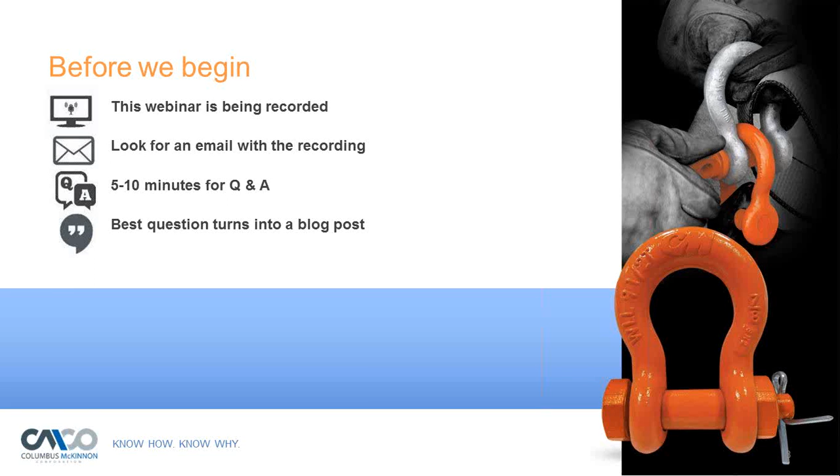Thank you, everybody, and good morning. Just a note that these presentations are no substitute for OSHA regulations or safety standards that are out there. We do encourage you to seek those standards and specifications out, as well as contact the manufacturer for any additional information. So we'll get started.

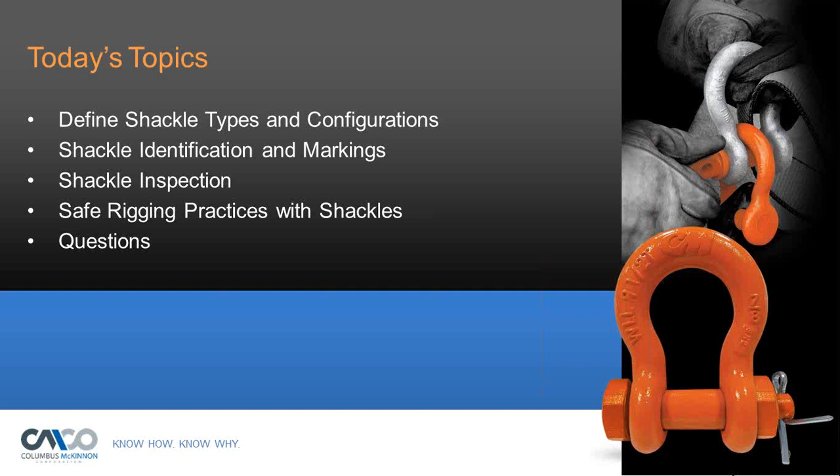Today we're going to define shackle types and configurations, shackle identification and marking, shackle inspection, safe rigging practices with shackles, and then we'll take any questions that you may have at the end.

When you buy a shackle from Columbus McKinnon, our shackle meets a variety of standards. There's a lot of quality and engineering that goes on, even though you look at it as a simple forging. Really, we can probably stack a pile of books two feet high that we go through to meet certain standards, so that you have a safe product in the industry and you're getting quality rigging hardware from us.

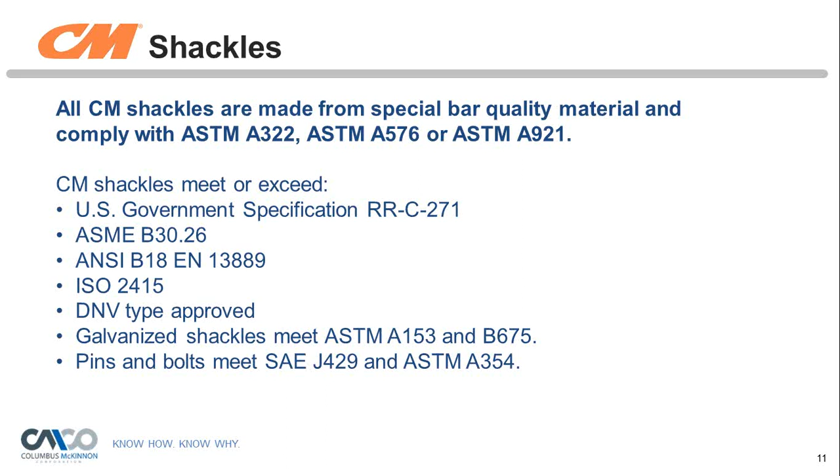So the types of shackles that are out there, and these are the most common: you have a screw pin anchor style shackle, and the shape of that body is what they call an anchor style. I'm not quite sure where the word anchor style came from, but that's where it came from.

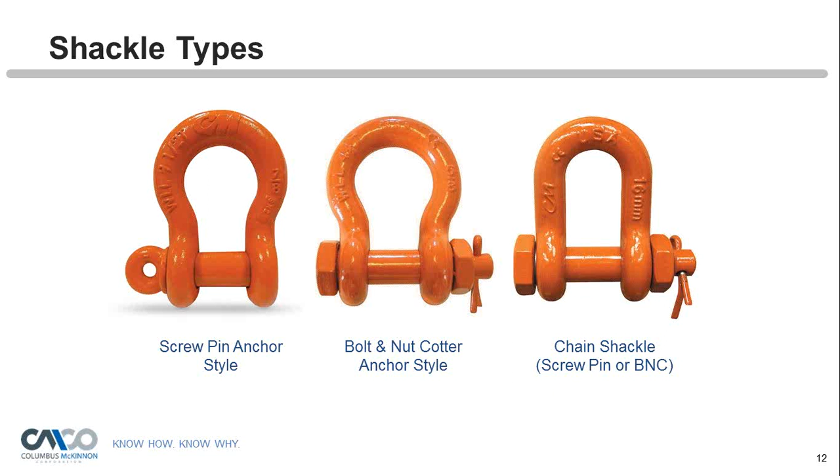Bolt nut cotter style shackle, you can see there, is a little bit more secure, has a pin with a bolt, nut and cotter in it. We use that for more semi-permanent applications, whereas the screw pin anchor style is more of a take-it-off-every-time-you-rig type. And then you have a chain style shackle, a smaller type, and you can get that in screw pin or bolt nut and cotter style.

So why would someone choose the screw pin style? Well, it's easy to remove. This is probably one of our most popular kinds of shackles, a screw pin anchor style shackle. You can get it painted, galvanized, self-colored, or in black if you so wish. If this type of shackle is going to remain in place for any extended period of time, then we recommend mousing the shackle. Really, if it's going to remain in place longer than the lift, or like a semi-permanent application, the bolt nut cotter is the way to go. But if you have these shackles and need them to remain in place, we do recommend you do what's called a mouse tail.

Hey Peter, what size wire do you need for a mouse tail, and how would someone go about doing this? Well, there really isn't any specification for what size wire. You want something that you can work with, that will bend.

There's a hole in the shackle pin there. That hole is actually there for a spanner wrench so you can loosen the shackle up. But you might want to wrap it 2 to 3 times around, go through the hole, through the pin. So something adequate, but not too difficult to work with. You want to make it easy on the riggers to do, something that just stops that pin from loosening up while it remains in place.

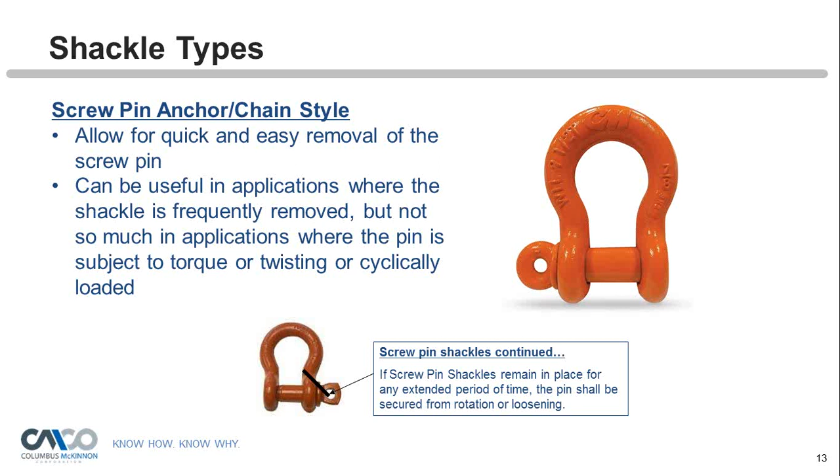Okay, great, thank you. Good question, we get that asked quite a bit. Okay, there's your bolt nut cotter style, a more permanent or semi-permanent type for applications where it's going to remain in place. That's the style you want to use, and you always need to have that cotter in place so it secures that nut from backing off.

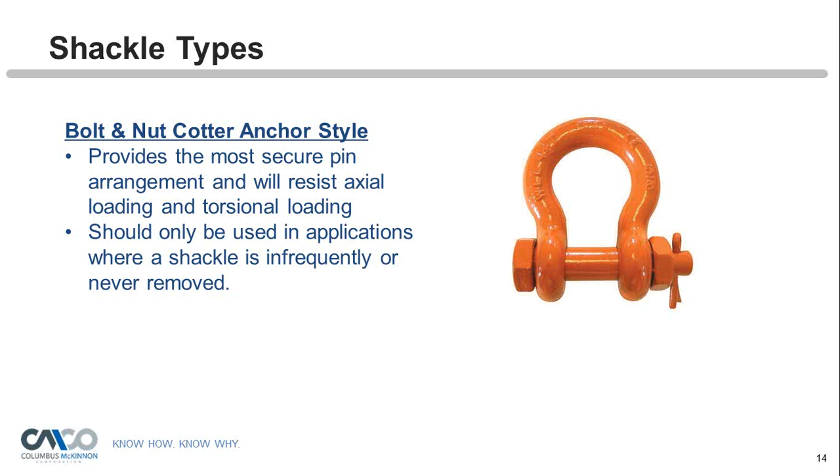And then you have the chain style or D shape, we call it D shape or chain style shackles. You can have bolt nut cotter, or you can have screw pin style of that. They're a smaller type shackle. They always have to remain in line - there's absolutely no side loading allowed with these.

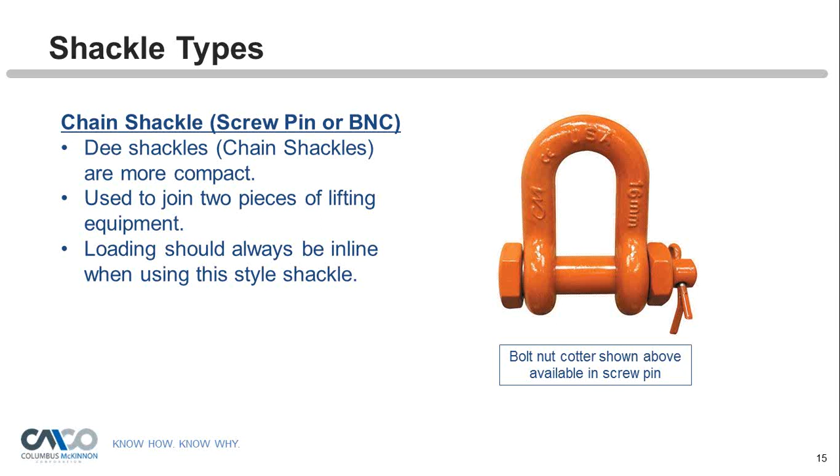We also have one called a long reach shackle that is used for applications where a hole or attachment is quite a ways down, so it has the same type of shape, but more for inline loading only.

Okay, then we come up with a round pin style anchor shackle, and the round pin really is not recognized by the ASME B30.26. So this is more for tensioning, pulling, load securement applications when it's not an overhead lift. So basically the rule is if the pin doesn't have a thread, or the body is not threaded, or you don't have a bolt nut cotter, then you shouldn't use it for overhead lifting.

So in the event that something were to strike up against that pin, you only have that cotter there and the pin can come out. So we do not recommend that for overhead lifting.

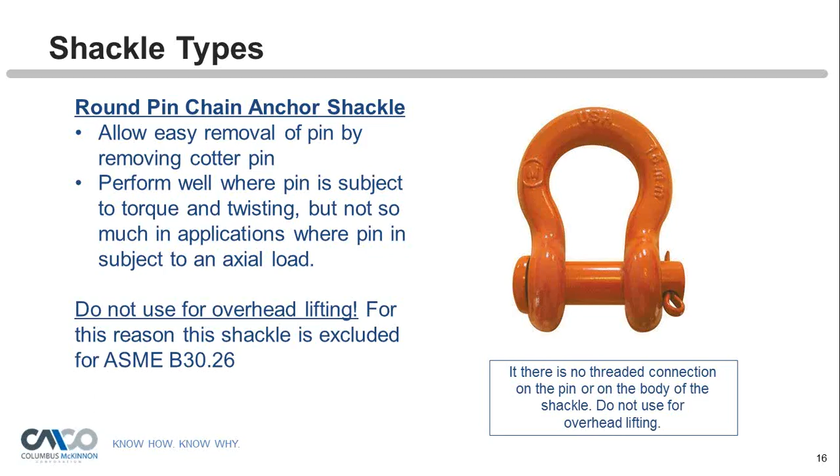So what type of shackle should be used for overhead lifting? Is it carbon, super carbon, alloy, or all of the above can be used? If everyone can vote - if you're on an iPad you won't be able to, unfortunately, but you can send me your answer on the Q&A pane. Everyone else should be able to just tick it off and vote. Give it another couple seconds. So again, what type of shackle should be used for overhead lifting? Carbon, super carbon, alloy, or all of the above can be used.

Well Peter, it looks like a few people mentioned carbon, but it looks like it's 30% alloy and about 66% believe all of the above can be used. Can you share the answer? Yeah, well 66% is correct.

All of the above can be used, and it gets a little bit confusing because when you talk about chain slings and things of that nature, we recommend only alloy chain slings for overhead lifting. But for shackles, you can use carbon, super carbon, and alloy. CM, by the way, is the only one that offers a super carbon shackle. In reality, it's a better carbon shackle with alloying elements in it - not quite an alloy shackle, but not quite carbon either, and we call it super carbon, which gives us higher working load limits.

Higher than - kind of an in-between - for basically the same price you can get a carbon, so it's a step up, and I'll get into that a little bit. But all of them have different work limits. So physically, size for size, you could have 3 - in this case 7/8 shackles - laid out on the table, and unless you looked at the embossing and the working load limit, that's the only way you would know what to use. You can't just rely on the size of the shackle for the working load limit, so you need to look at the embossing because you have 3 different types.

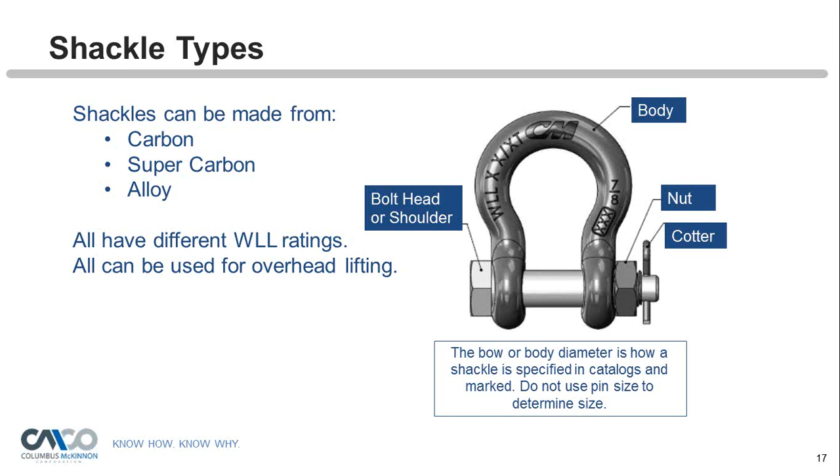And then they have design factors. Carbon and alloys have a 5-to-1 design factor, and our super carbon has a 6-to-1 design factor. So for ease of explanation, let's say a shackle has a 1,000-pound capacity. The carbon and the alloy at 5,000 pounds, it would start to deform. That's where the shackle would start to deform. Where a super carbon is 6-to-1. Obviously, no overloading is allowed whatsoever.

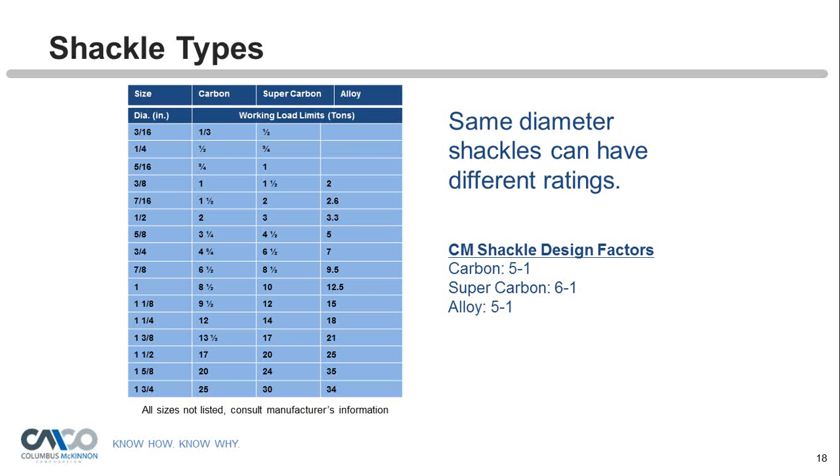This is when I go back to that original slide, I talked about the quality and the standards that Columbus McKinnon meets. That's what allows you to have, in the event something bad were to happen... things can happen beyond our control, and mistakes happen, but we always want you to stay within the work limit and figure out what your tensions are and things of that nature. But just to give you an idea of the design factors there, which is interesting.

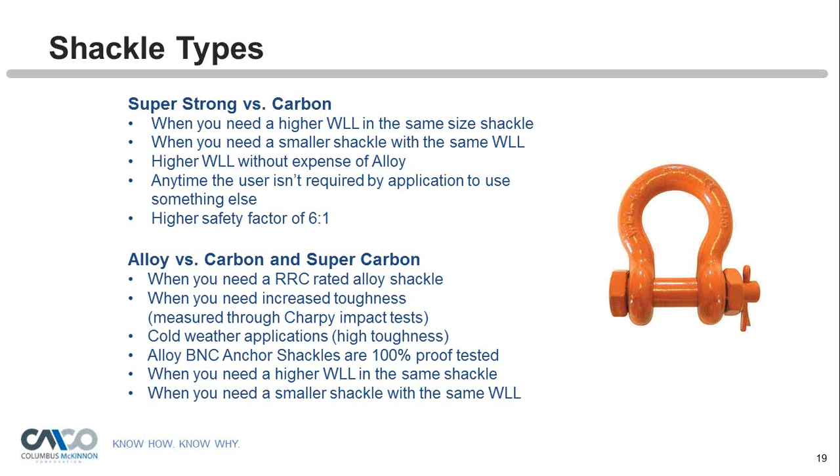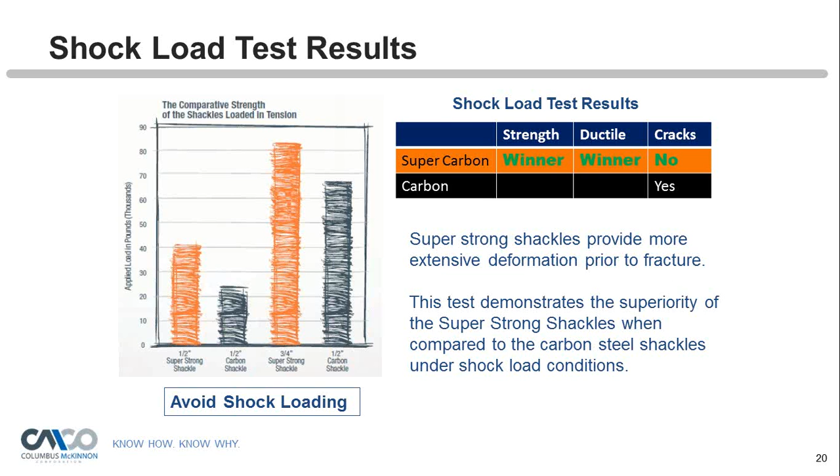Okay, shackle identification and marking. So what's required on a shackle is the size of the shackle - you can see on the body there at 7/8. That's required. The name of the manufacturer, the unique name of the manufacturer, is also required on there. And of course, the working limit of the shackle is all required. What's not required is a serial number.

Now, a lot of people want to start inspecting shackles and things of that nature, which you can and you should. And the rigger should be inspecting each and every lift. It doesn't take long to inspect a shackle.

So those in the Navy or in the nuclear world, they have a pretty stringent system, and that helps them a lot for tracking and inspections and things of that nature. So, even though it's just a forging, you can make the shackle sophisticated by offering RFID and serializing it and creating inspection reports for them.

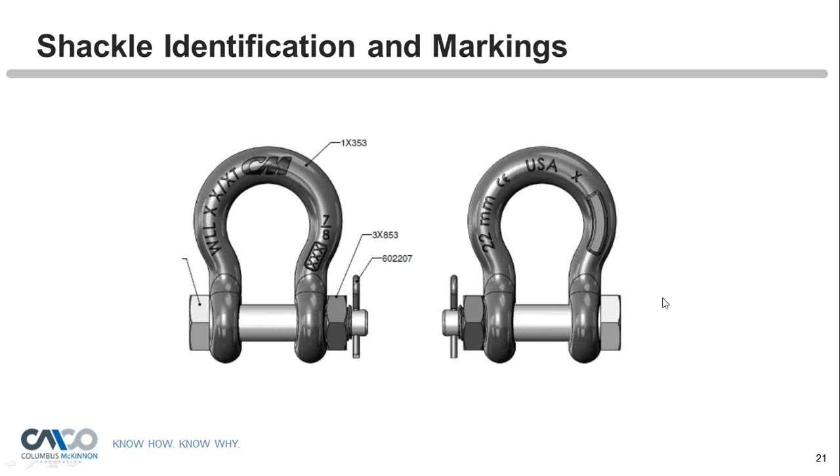So there, like I said, name or trademark, manufacturer, rated load, and the size - that's all required by ASME B30.26. I have seen shackles out there where they're kind of second-rate shackles, if you will, and they may have the country of origin on there, and that's it. And the country of origin is not the manufacturer. So they have the work limit, they may have the size and a country of origin, or no manufacturer at all, so you don't even know who made it. So who do you call when something goes wrong? Who do you call for answers? Who do you call if you have technical questions?

The very first slide I showed you was look at the quality that CM puts into their forgings. Again, it'd be a stack of books about 2 foot high, and we have this regular quality process and things of that nature.

I forgot to mention that our shackles are made in Chattanooga, Tennessee, and we encourage anyone that wants to visit our plants can see shackles in action and see them being made. Certainly would welcome anyone to the plant there.

All right, so we talked about the bodies a little bit, but then we have the pins. So the pins are identified as well, and that's another sign of a quality shackle - look at the pin. The pin has to have an identification mark on it. You can see we put CM and HS, that stands for high strength, and we have a trace code on the pin. We can also offer RFID chips within the pin as well.

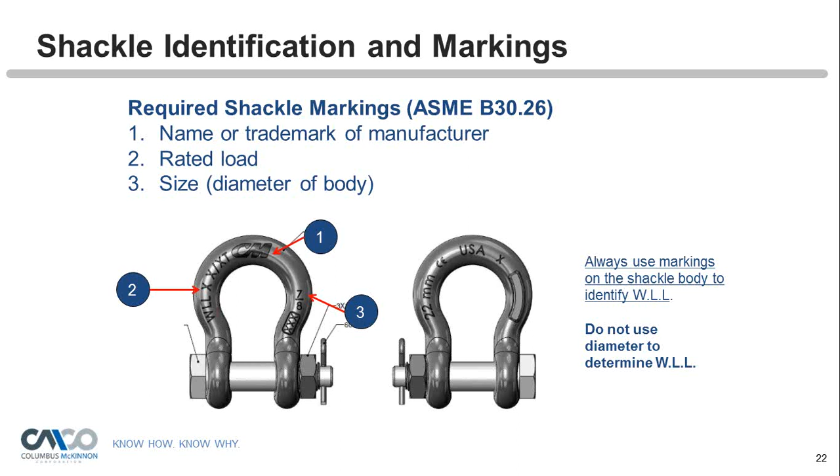Okay, and then okay, perfect. Thank you, Peter. Okay.

So kind of an actual picture of one of our pins. You can see the trace code on there, the CM name, and the high strength - again, another sign of a quality shackle. Even every part of that is labeled so that you know that you're getting quality parts inside it.

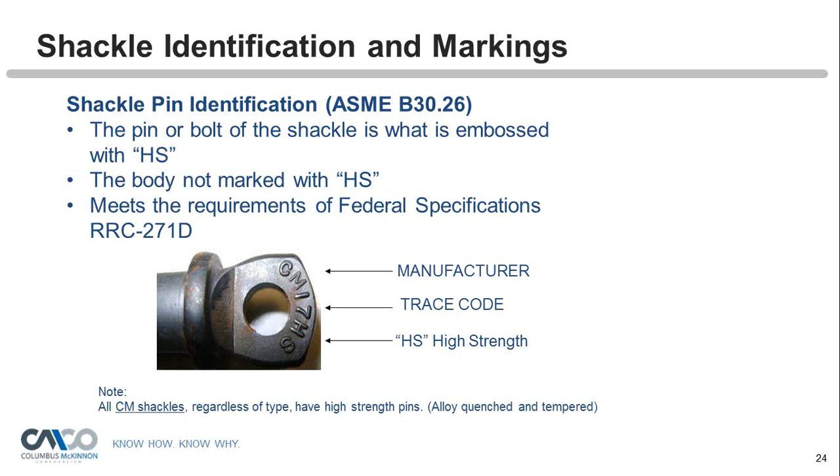So think about that - next time you look at a shackle, you don't know who the manufacturer is, and then where did that pin come from? There's no markings on the pin, no traceability. These are all things that you want to be sure are there, so that when you're choosing a quality product.

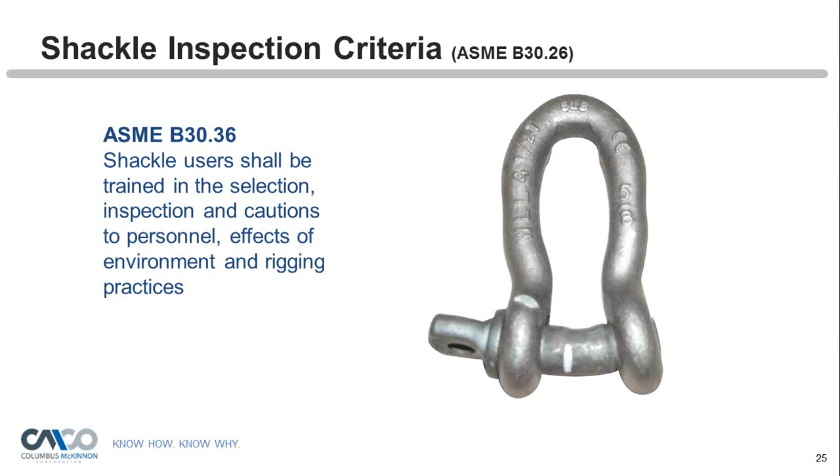B30.26 says shackle users shall be trained in the selection, inspection, and cautions to personnel, effects of the environment and rigging practices - so basically a trained rigger. So we do offer rigging training that you can learn about shackles. This seminar, this helps this training as well. And we can actually come to you, we show you how to use them hands-on, and there is probably 100 uses of a shackle, how it can be used in different applications, and that's what we're going to touch upon as we go through here.

Per B26, a visual inspection shall be performed by the user or other designated person each day before the shackle is being used. So basically, that's the rigger. The rigger needs to know, a qualified rigger, is the shackle safe to use? Are all the parts there? Is that a quality shackle? Are all the markings there? Okay, and that's important.

Semi-permanent shackles in inaccessible locations where frequent inspection is not feasible shall have what's known as a periodic inspection. So if you need a lift to get up there, obviously we can't inspect it each and every lift. An inspection criteria called periodic inspection means you're going to have to set times where you go up and look at that shackle, based on the application. It could be every month, could be every 4 months, could be yearly, but it has to be specified.

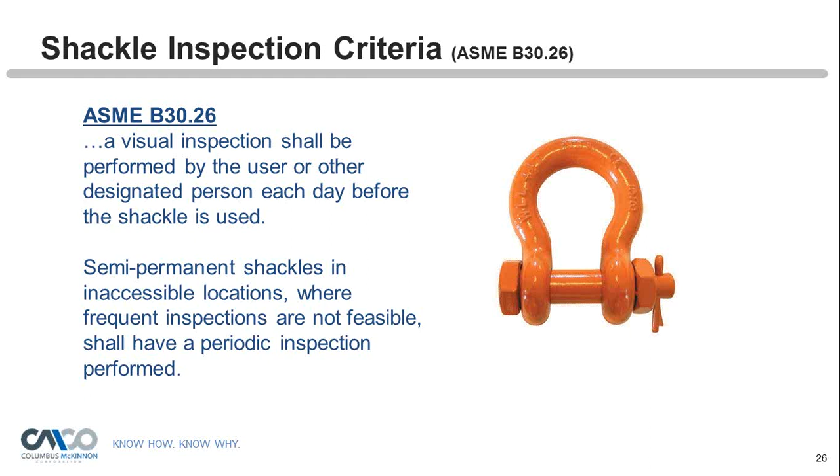So what's a periodic inspection? It's a complete inspection performed by a designated person. It shall not exceed a year. Written records are not required. Obviously, these shackles are not serialized, so how would you keep track?

One way, if you want to have written records, is the stamping that CM allows with their raised pad surface and RFID, that would help you keep written records if you so wish. For those in the entertainment industry, and this is just my opinion, not to be confused with any standards, having RFID and serialization might be something to think about, given the nature of where these shackles are used, basically suspended equipment over performers and things of that nature. So that may be something to think about. Again, that's my opinion.

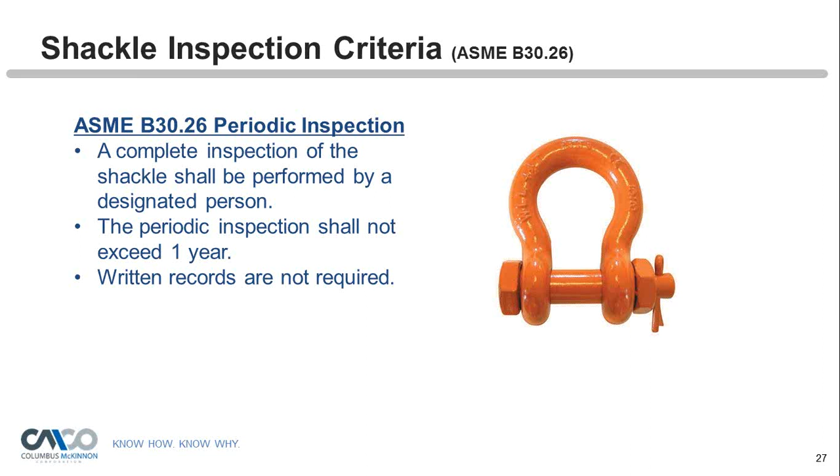So why would I discard the shackle? What are the things I'm looking for to be sure either I'm going to take it out of service, or the shackle is safe? You're going to look for wear, and any component that's worn 10% of the original dimension, we want to get rid of. Nicks, gouges, any distortion.

Check the pin. Is the pin threading on the body? Now, I'll probably have another slide on this. I think I do. Let's talk about the pin. Sometimes people will take a shackle and say the pin is fully seated, or fully threaded.

A shackle is a forging, so a couple of things. What I really would look for is, does the pin thread in nicely, and do I get full engagement on the body itself? So if I had a screw pin shackle, I'd look on the body on the other side, and I want to see that pin flush, or it might just stick out slightly, maybe an 1/8 of an inch. But if it was recessed within that body, that would cause me concern, saying, why won't it go all the way through? There must be something wrong with it, or some distortion.

But you're not always going to see all the threads. Sometimes, and we pulled a bunch of different shackles from the field, from competitors and us, every once in a while you'll see an extra thread cut. It's just the nature of how pins are threaded, with actuators pushing them into the threading machine. Once in a while you get one pushed in a little too far, and you get an extra thread. That does happen. We take measures trying not to, but it does. That would not be a rejection criteria. You're looking for the threads to be fully engaged within the body.

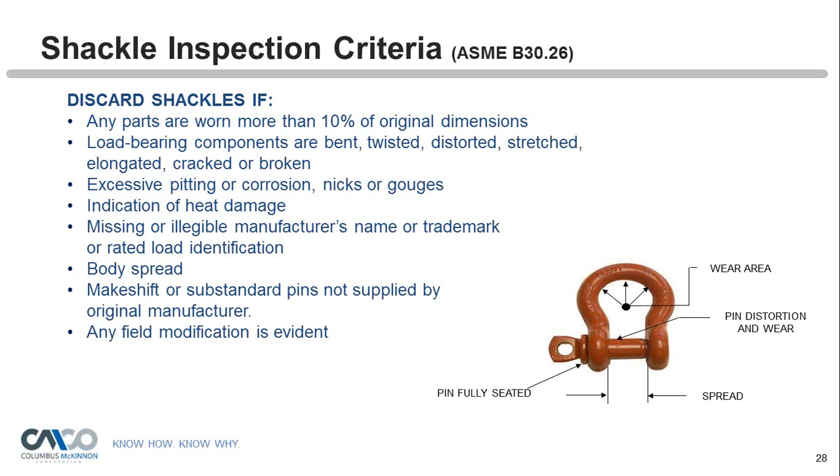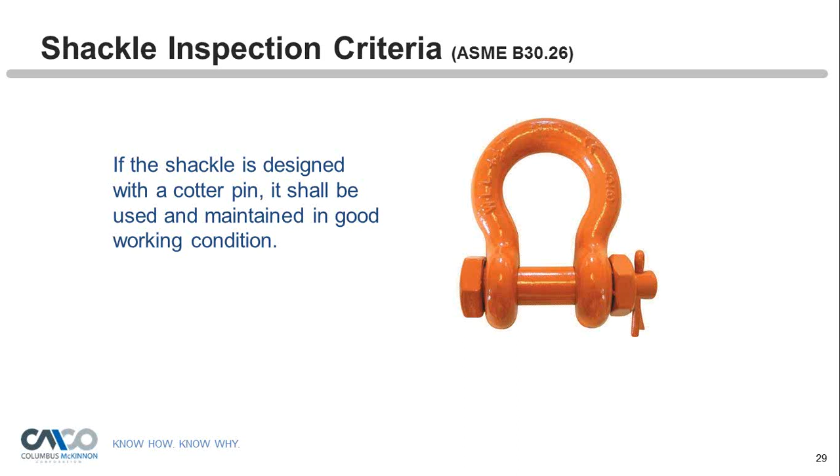So again, the shackle that has a cotter pin, the cotter pins must be there. Those can easily be lost. If you lose your cotter pin, you don't have to call us to get one. Any cotter pin that fits in there properly would do, but it needs to be in there for the bolt nut cotter style. If it's missing, you want to get it on there, because that will prevent the bolt from loosening or backing off.

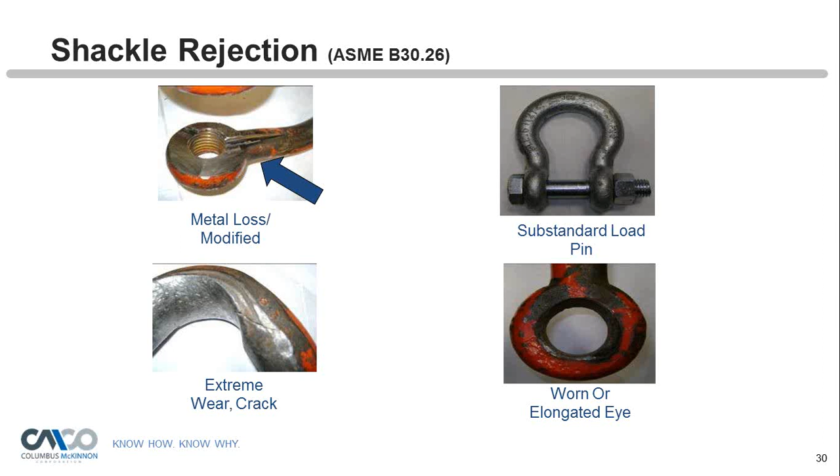Looking at cracks, elongated eyes from overload, distortion - again, more metal loss, you can see there extreme distortion. If I saw that overload, whoever was using that shackle - if I found they weren't qualified, or if I saw they were using a ground down or deformed shackle, I would question the integrity of the rigger and make them go back through training.

So one of the things I do during inspections is document the things I found that were in service that shouldn't have been, and I always recommend that their riggers need to get back to some training, because I shouldn't have found those things. It really is the rigger's responsibility to inspect their rigging equipment and get it out of service, not wait for a third party to do that. It just shows that the rigger wasn't qualified.

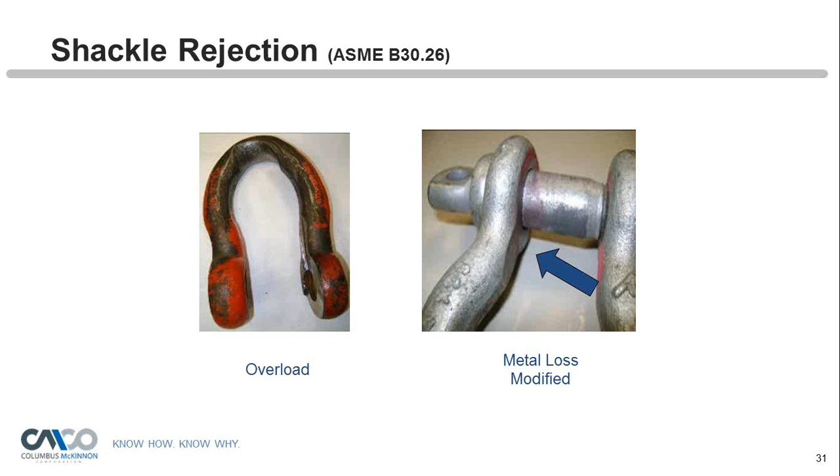All right, some safe rigging practices with shackles.

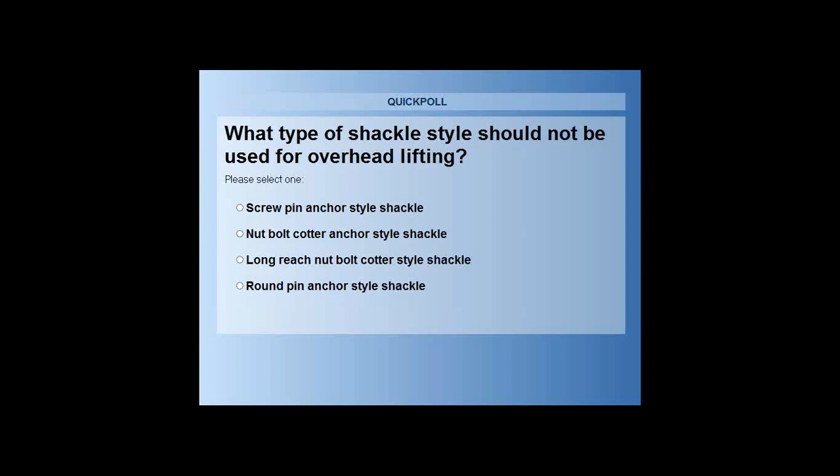Yeah, the 80% is right. We mentioned that in the beginning - the round pin doesn't have a thread, it just has a cotter going through it. So that is not recommended for lifting; it's more for towing, load securement, tensioning, things of that nature, not overhead lifting. For those that entered the long reach or chain style shackle - those are the ones that have to remain in line, you can't do any type of side loading with that, which we'll talk about in a bit.

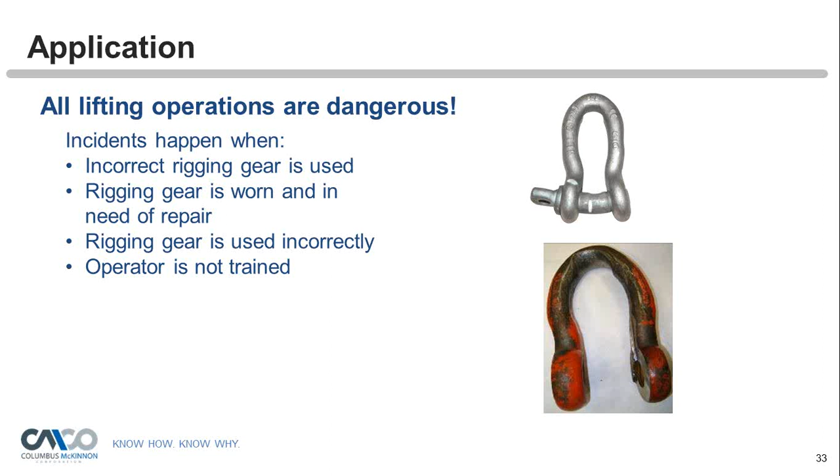Thank you, Peter. Again, rigging operations and lifting operations are dangerous - we've got suspended loads in the air, so we need to take precautions. We need to make sure our gear is inspected, that we're not using incorrect gear, that we're using the gear correctly, and that our riggers are trained and know what they're doing. When selecting any type of rigging gear, we need to know how much weight is there, where our center of gravity is, the number of attachment points, any angles of loading - because that lets us figure out tensions, and if we know our share of load, we may not have to figure out tensions separately.

Sling charts are nice because when we look at slings, the charts give us working load limits since they've taken the tensions into consideration. But if you look at a shackle chart, it doesn't give you the angle of loading - it just tells you the working load limit of the shackle. So when you're going to attach to a shackle and your slings are coming in at angles, you really need to know what the tensions are so that you size the shackle properly.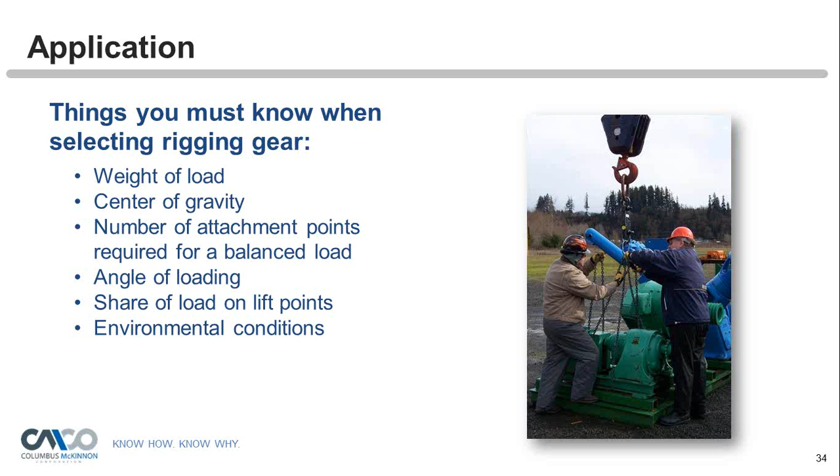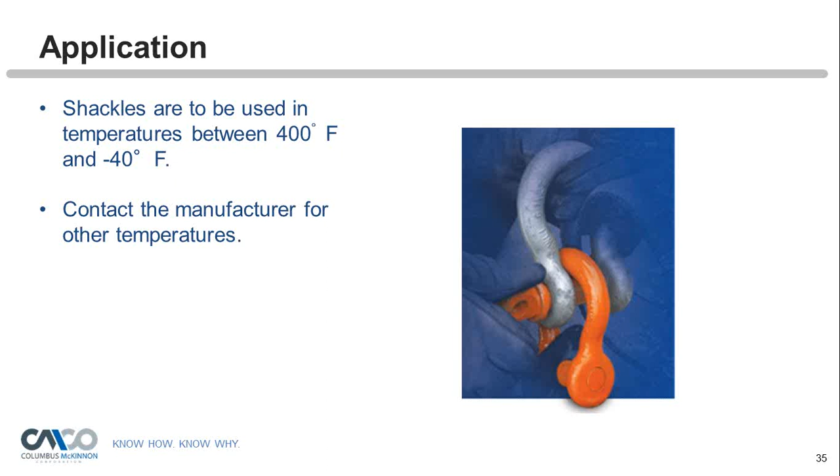Shackles can be used in temperature ranges from 400 degrees Fahrenheit all the way down to negative 40 degrees Fahrenheit. Any temperatures above or below that, we recommend you contact the manufacturers to see what their constraints are, what their deratings are, or even if they want you to use a certain style shackle in those environments.

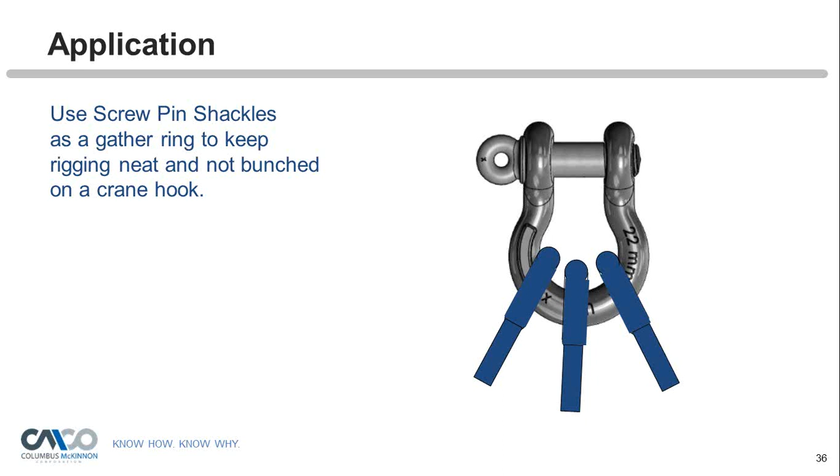Shackles can be used as gathering rings. So let's say synthetic slings that normally do not have a master ring, you can connect them to a shackle and then to your crane hook to make a bridle assembly. We want to be sure that whatever we're putting in there is laid in neat, doesn't bunch up, doesn't bind, and we stay within the workable limit of the shackle.

The D-shape or long reach shackle has to remain in line. You're allowed maybe 5 degrees out of line, but other than that, you want to keep the tensioning and those arrows in line at all times.

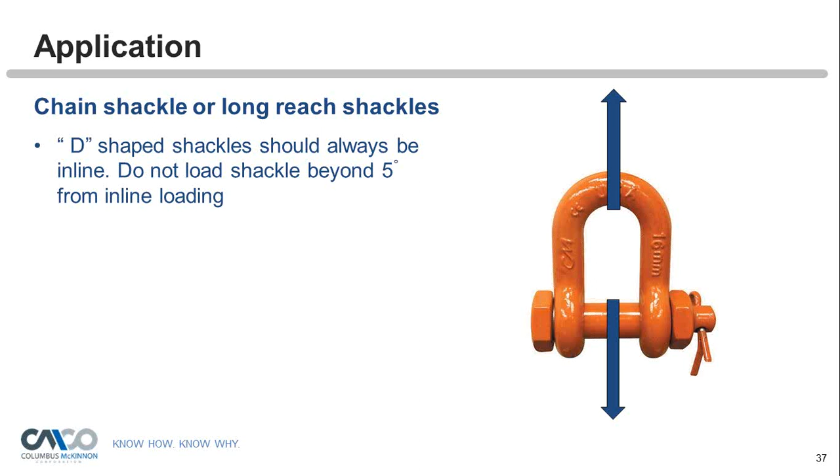Things to avoid: you can see there where synthetic slings kind of turned and the shackle, that's not the way it was intended, so we want to keep that equipment in line. There are web saver type shackles and things of that nature that you can use.

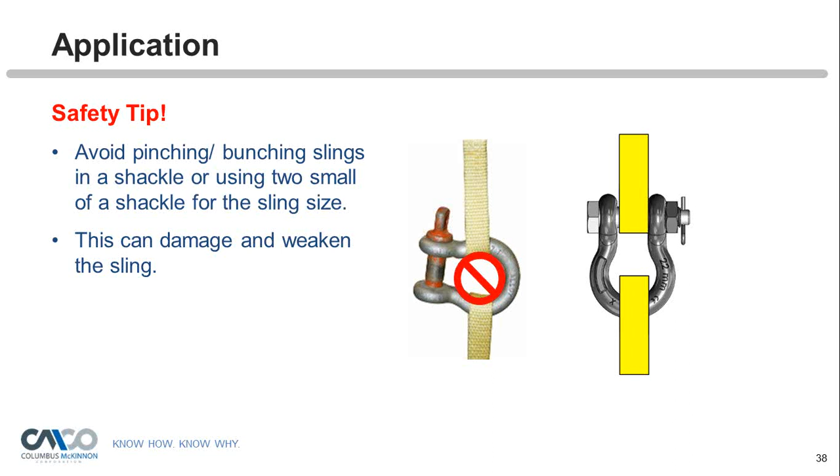Now you can connect 2 web slings together, but you cannot do that with chain. The ASME B30.9 standard does not allow you to connect slings together like that, but in the synthetic world, they do allow it.

When connecting to eye bolts, we recommend you put a shackle there and not put a hook directly into an eye bolt, because you can cause side loading or binding in there. So we always want to place a shackle into an eye bolt. We have a blog on proper use of eye bolts on cmcolive.com.

I think we just did this blog not too long ago, Gisela, where we talk about use of eye bolts. In that picture, not only is the hook within the eye bolt wrong, but the orientation of the eye bolt is wrong. We talk about putting a shim underneath and getting that orientation of the eye bolt into the tension. So you can go check that out.

I can include the link. We actually just published it this week, Peter. So yeah, it's very, very current. Everyone that's registered for this, we certainly can put that link in there, and you can read up on eye bolts.

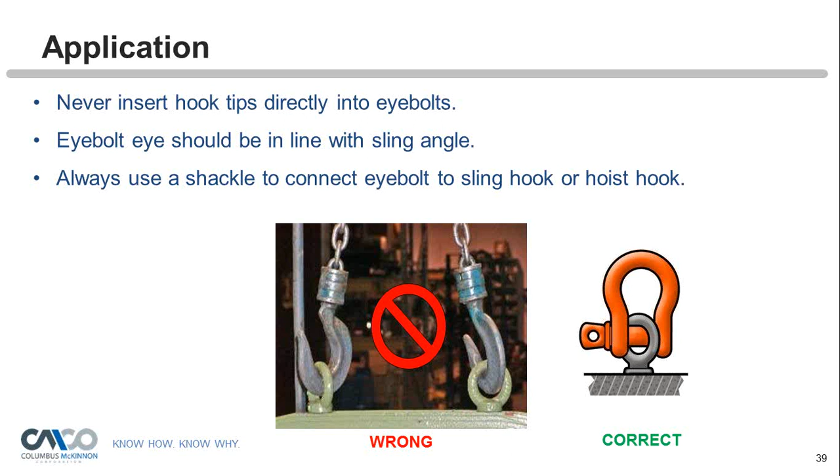But definitely put a shackle in there so that your hooks fit properly, and then your shackle can articulate where your eye bolt can't. It's just a safe way to use eye bolts. I strongly recommend swivel hoist rings even in place of eye bolts, but that's a whole other story and blog or webinar for that matter.

Different attachments to shackles: wrapping or looping the chain through it, you can do that. You just have to take proper D-to-D reductions, which is the diameter of the chain compared to the diameter of the shackle. Chain has a D-to-D ratio which may reduce the working load limit of the sling if you're not at least 6 times the diameter of that shackle.

Correct: here's the eye bolt with the shackle attached, and a hook can go directly in there. That's correct. Choking a web sling in an eye is not correct—that can definitely cause a knot in that sling and create enough heat where it can sever the sling, so that is wrong. Instead, we want to put a shackle there and connect a web sling appropriately.

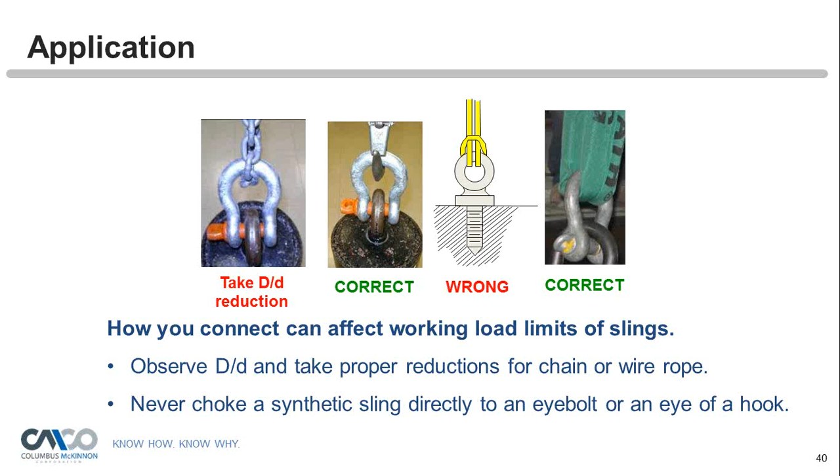So, different types of connections—you can see here there are a lot of uses of shackles. When connecting to a pad eye, we recommend having at least 50 to 80% of that shackle width or clevis filled up, trying to avoid point loading as much as possible, because it creates a better situation. Everyone will ask us, what's the criteria for the correct pad eye or design of pad eyes or lift points?

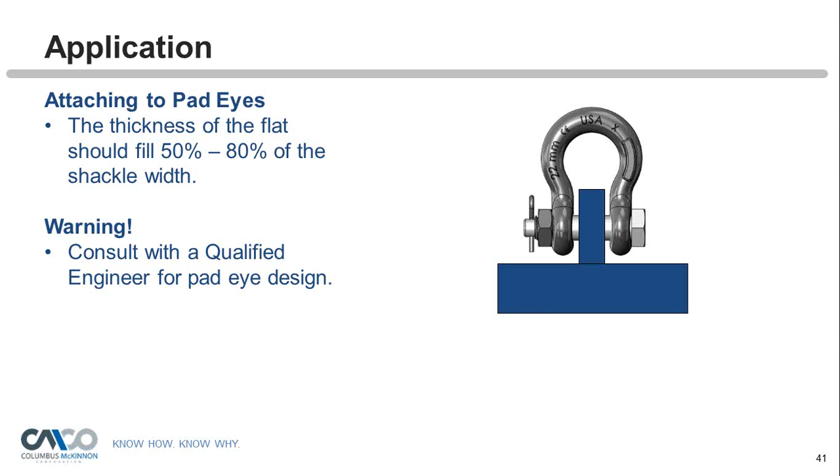There really is no safety standard or OSHA standard that spells it out. I would consult a qualified engineer for the design of that eye to be sure it's sound, and they can tell you how much weld it needs. The best I can do is advise looking into BTH-1, the below-the-hook lifter standard, because it has some information in there.

So, different connections for the shackle. There are times you may have to connect two shackles together for various reasons, whether doing a step down, or lengthening a synthetic sling that's a little too short, or for adjustment. When connecting shackles, we want to try to go bow to bow or bow to pin, and connect shackles of the same size or diameter to avoid sharp edges, and try to keep the loading centered and in line.

See how the orientations go. What I always recommend when we train riggers is to get the slings taut before you go to lift, and see how everything renders itself. If you can straighten out the shackles, great. If you can't, you want to see what kind of side loading is going on there, and derate your shackles appropriately.

Peter, why do we recommend not to rig shackles pin to pin? Yeah, you can see there we don't show pin to pin. One of the main reasons is that it can slide around in there. So while you're lifting, when you think you're in line, you can get something off center, which would derate that shackle. You can use bushings, spacers, washers to try to keep everything centered.

But the ideal way to load a shackle is to center load in the bow or saddle on the pin, with mating objects close to the same diameter as the pin or bolt. The ideal condition applies the load over a rounded surface of sufficient diameter to prevent cutting on the pin, small enough to allow the shackle to deform into a shape where the load is primarily tensile if overloaded. When you get too small a pin, and connect something else to it, it creates a point load that can cause damage to that pin, and we don't want that to happen.

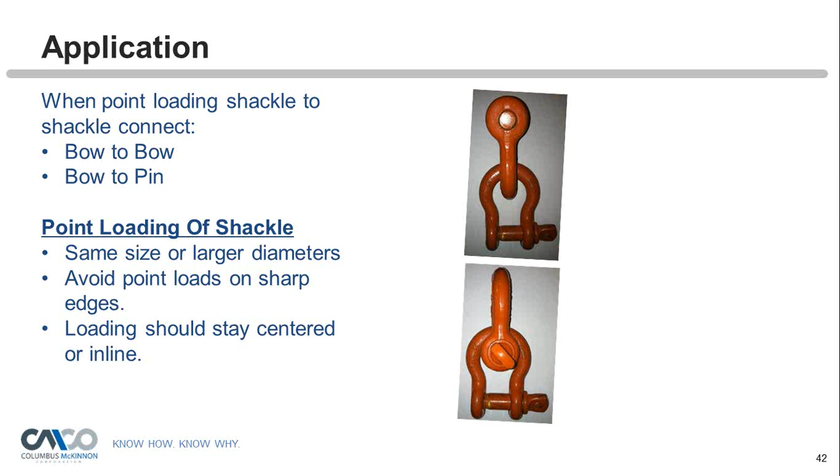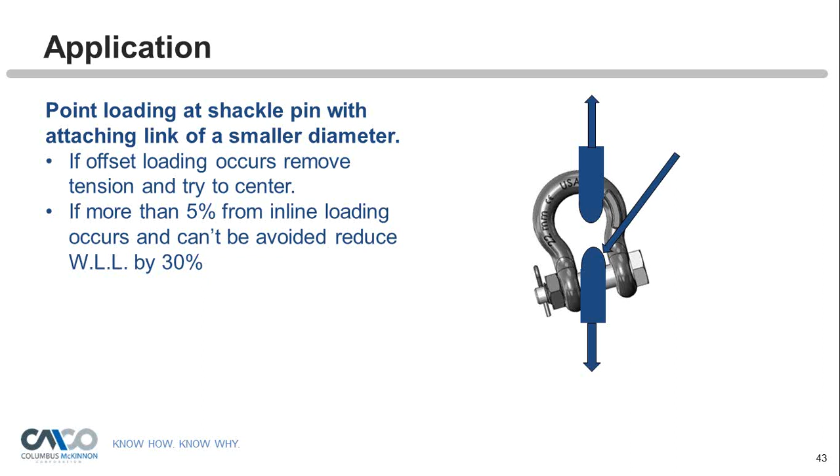So there you can see, whatever we connected, the shackle didn't quite line itself up right, and so if I'm rigging, I'd have to look at that. If more than 5 degrees or 5% off in line, you may want to take a reduction of at least 30%. We have charts in our rigging books and rigging guides that show reductions in working load based on the angle or side loading going on in the shackle.

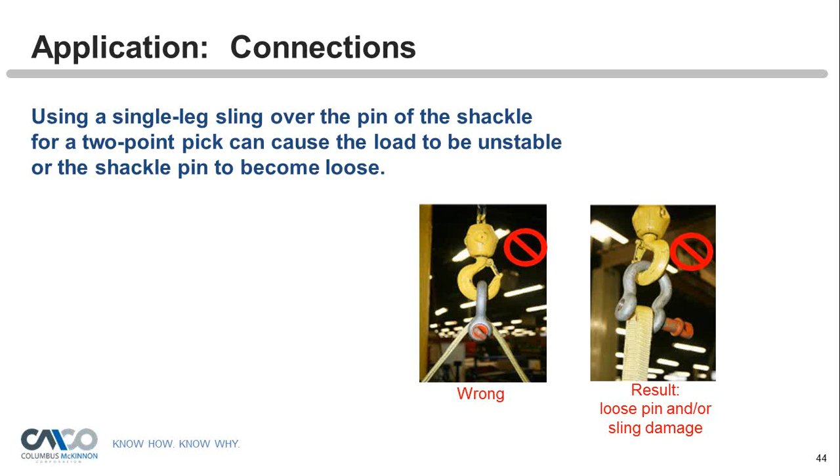We try to avoid side loads, but not every application allows that. It will happen, and ASME B30.26 offers side loading reduction information out there, so you want to get that information and derate your shackles properly. Here you can see some improper loading on the pin, where a sling is looped through and they're going to slide that shackle along to find center of gravity, which can loosen up the pin. So, again, that's not recommended.

When you look at loading charts, when you're connecting two slings to an anchor style shackle, the working load limit is based on 120 degrees of included angle. I have another slide that shows that, so it's kind of symmetrical loading where you get the full working load limit of that shackle.

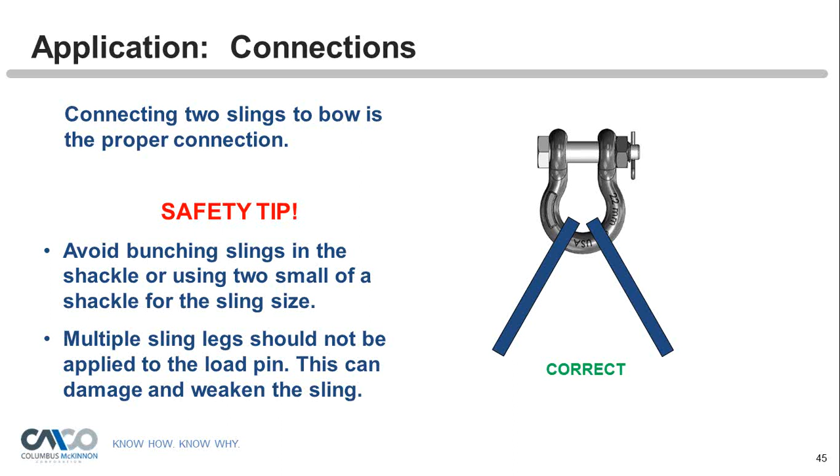Again, we want to avoid the slings from being bunched. We don't want to cram things in there because that's just going to cause damage. So what was I talking about with the 120 degrees?

You can see here on a crane hook, when you connect two slings to a hook, you want to stay within that 90 degrees, which is a 45-degree horizontal angle minimum coming to the hook. If you can't achieve that, you're going to have to place a master ring over that hook or use a shackle, which allows 120 degrees of included angle, which is 30 degrees from the horizon.

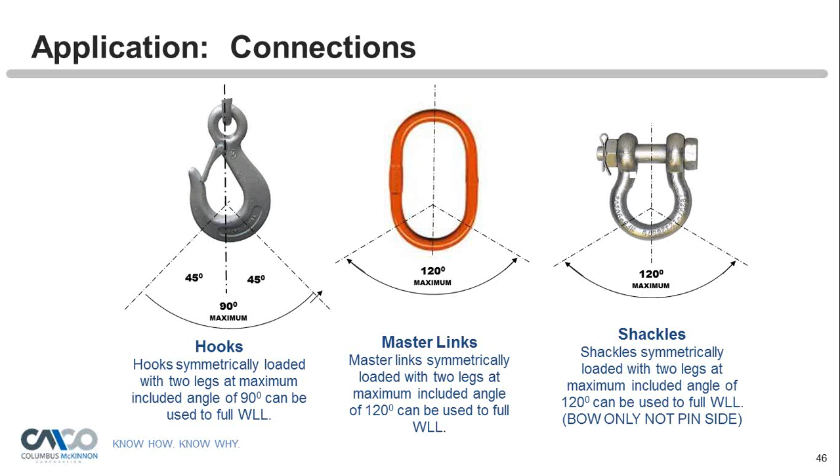When you're doing chokes, chokes can cause a lot of friction. A choke hitch, by nature, reduces the working load limit of your sling at least 20% if you render your choke properly per the charts. However, it causes friction in the running part of the choke, basically where you're lifting with the crane. That part of the sling can cause a lot of rubbing and wear when you use just sling on sling. So a shackle eliminates a lot of the heat and pinching going on, and it creates a nice attachment for that choke.

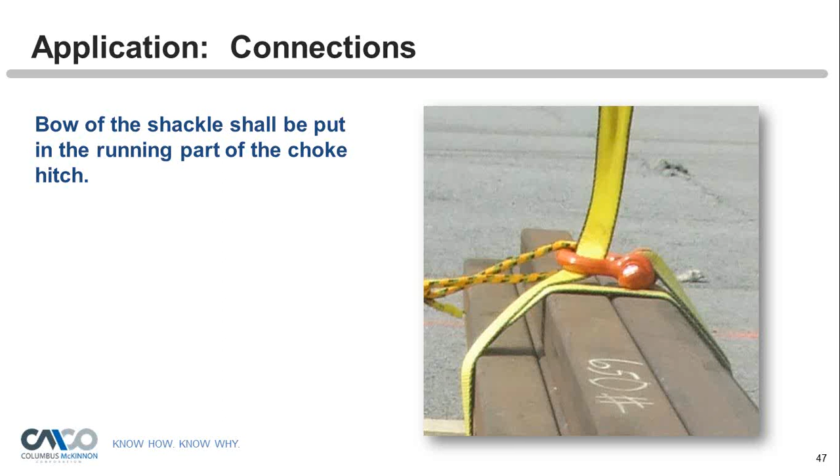Okay, I've got my final polling question. The question is, what type of shackle must always have loading in line? Is it the chain long reach D-shape, the screw pin anchor shackle, the nut bolt cotter anchor style, or none of the above? Let me know what you all think.

Looks like it's coming in, I'm going to give another couple seconds here. Okay, about almost 70% have voted. 90% think chain long reach. 5% think screw pin anchor. A couple more split between the final two answers. So what is the answer?

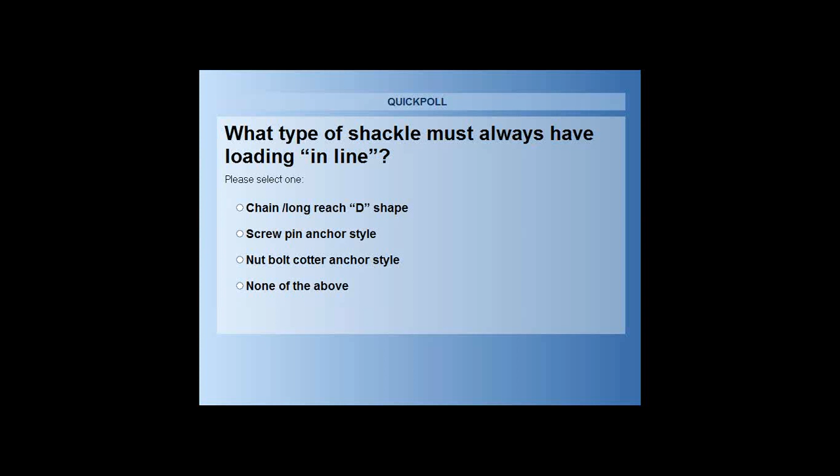Yeah, the chain style long reach always has to remain in line. That's important -- you can distort that shackle.

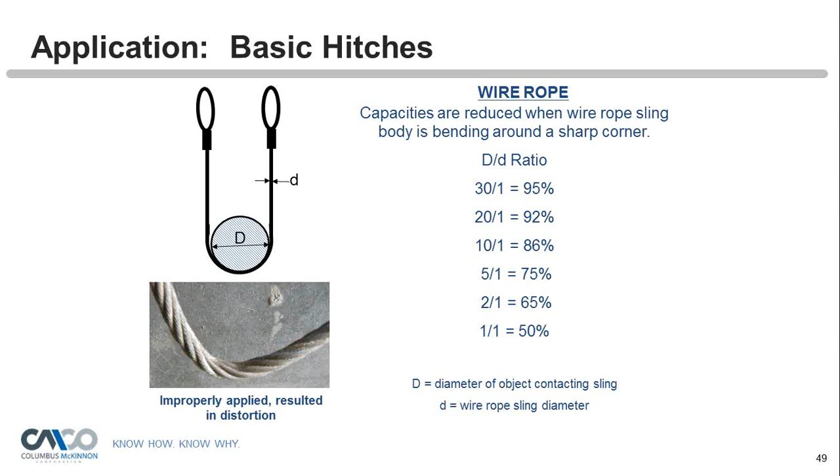Great, thank you. Okay, so we talked about D to D for a little bit, and this is wire rope D to D. I want to mention this because a shackle is often used to connect wire rope, so basically you have these D to D reduction charts. Most of the time the charts you see have a 25-to-1 D to D for the working limit of wire rope. The large D is the diameter of what is placed in either the eye or the body of the sling, and the small d is the sling itself -- that would be the same for chain as well.

So you can see here some different applications. When you see a shackle connected to an eye of a wire rope, we train to use a larger shackle than the diameter, but in reality it's got to be equal to or larger than the diameter of the wire rope of the shackle that you place to the eye. The reason being, you can distort the eye if you use something smaller.

Okay, because basically we talked about that with point loading for pin to pin -- the point loading can distort that eye. So you want to be sure that the pin is large enough, or the shackle body is large enough, or matches the diameter of the wire rope.

And then you can see all the way to the right there, if you're using the same size shackle in that configuration, you're going to get at least a 50% reduction in that sling because it would distort. So there's where you would require a 25-to-1 ratio of what you're placing in there.

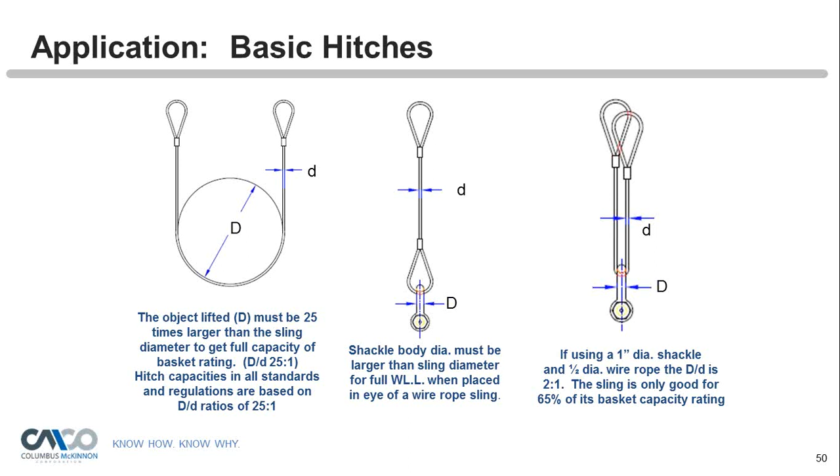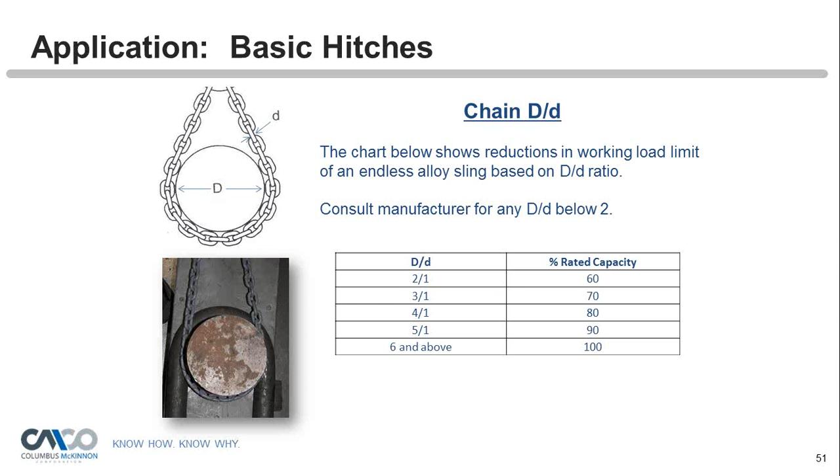The first question, Peter: I was wondering what the proper orientation of 4 shackles on a hook or master link is when the headroom is an extremely restricted application. Are they all bow up, bow down, or 2 up and 2 down? We recommend bow to sling, whatever you're attaching to. Maybe they're using all shackles for that situation - if you have 4 shackles on a hook or master link, are they all bow up, bow down, or 2 and 2? What I would do is, it really doesn't matter, but what's best would be to keep those shackles centered and in line. I would take a look at how they orientate - do any of the shackles tend to orientate differently. You want to be sure to keep those in line. So it really doesn't matter, there's no set criteria for that. I would be more worried about keeping everything in line on those.

Okay, question 2. We've got a few people that touched on this, but there was a question about mousing. Is it possible to provide an illustration of what a mouse tail should look like, and can zip ties be considered acceptable for mousing the screw pin, or potentially even plastic wire ties? Yeah, I would think a zip tie would work, or a wire or anything like that - anything that can hold that pin from articulating, backing off, or becoming loose. Maybe we'll do a picture of one and show an example. We don't have a picture yet, but I can easily do that for you. Sure, zip ties would work, plastic wire, but something - again, there's no set criteria of what diameter or how strong it needs to be. It's just a safety rule of thumb.